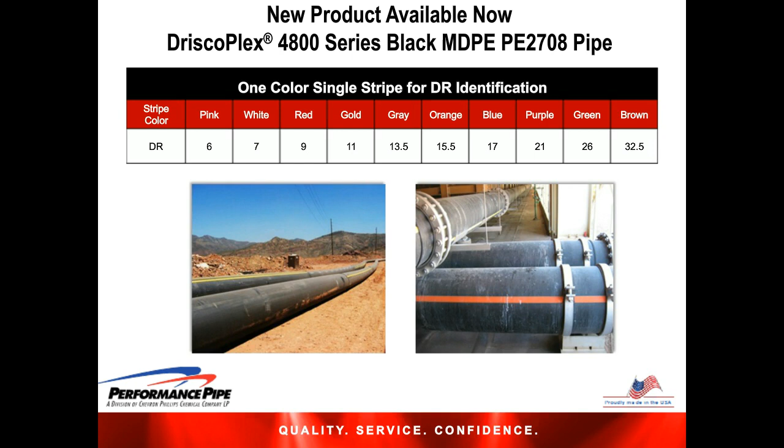This reflects the polymer's crystallinity, which in turn gives the material strength and stiffness. The second digit identifies slow crack growth resistance based on PENT testing, or Pennsylvania notch testing.

The last two digits provide the material's maximum recommended hydrostatic design stress for water at 73 degrees Fahrenheit. The PE 2708 material has the last two digits 08, which represents a hydrostatic design stress of 800 psi at 73 degrees Fahrenheit. This is the same hydrostatic design stress as a PE 3408 material, so the pressure ratings are the same.

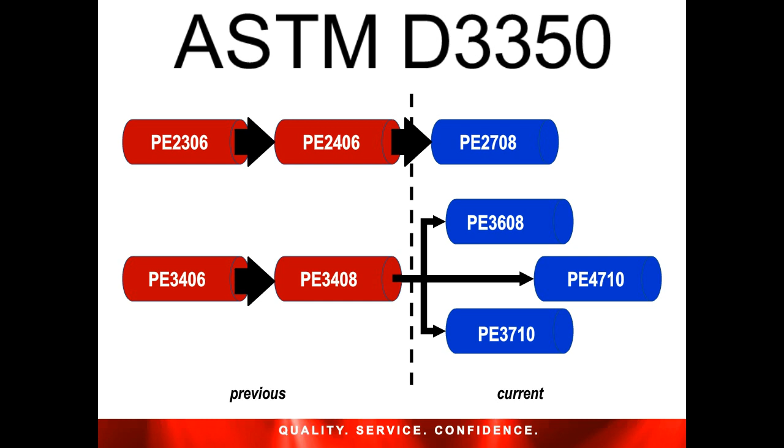For resistance to slow crack growth, a PE 4710 material requires greater than 500 hours of PENT testing, compared to the previous PE 3608 material requiring only 100 hours of PENT testing, while the new PE 2708 material achieves greater than 3,000 hours of PENT testing. This virtually eliminates slow crack growth as a failure mode.

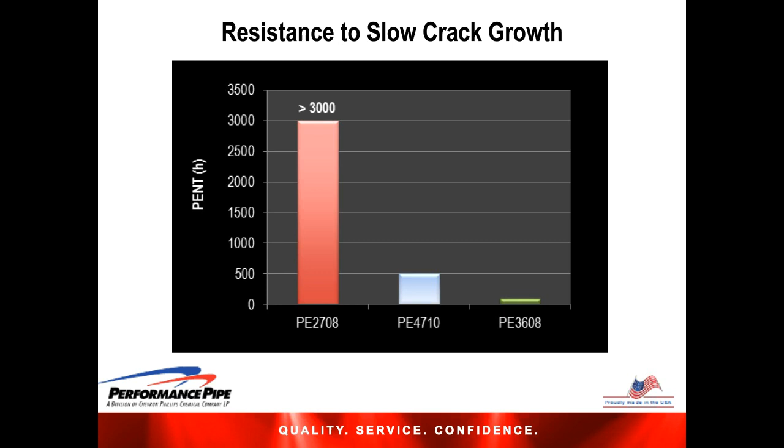Like standard PE 4710 materials, the PE 2708 is a solid wall pipe produced by conventional extrusion. The process is OD and wall thickness controlled to produce sizes from half-inch to 54-inch outside diameter, with dimension ratios, or DRs, ranging from DR7 to DR41.

In addition to the pipe's hydrostatic design stress we discussed, the pipe's specified dimension ratio, or DR, is used to determine the pipe's pressure rating or design pressure. Very simply, this is the outside diameter, OD, divided by the pipe's minimum wall thickness. So for a given outside diameter, the lower the DR, the greater the wall thickness.

The wall thickness capability for this new product is generally limited to around 2 1/4 inches as far as the wall thickness. However, that is dependent on the diameter of the pipe.

Basically, smaller diameter heavy wall pipes have more heat in the pipe than a larger diameter pipe. The bigger pipes have more surface area than smaller pipes, so the heat dissipates faster, resulting in less slump. So we can do heavier walls in bigger pipes than we can in smaller pipes. Please check with your distributor or pricing coordinator to determine the manufacturing capabilities to meet your requirements.

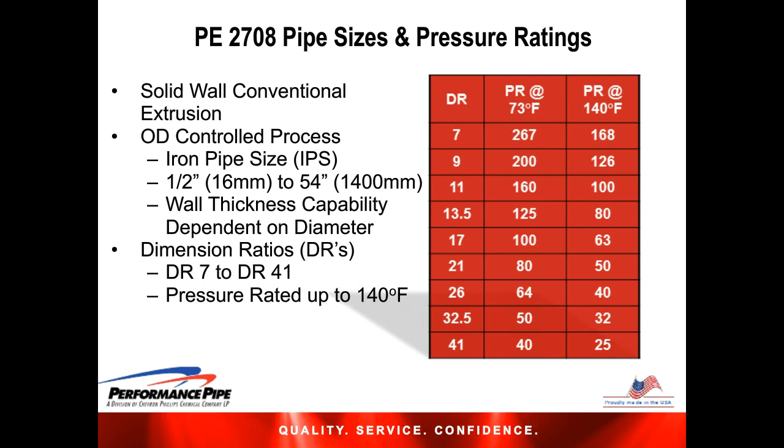These next two slides show the long, successful history of medium-density pipe in the United States. When the first medium-density pipe was introduced in the early 1970s as a PE 2306 material, it had a 600 psi hydrostatic design stress. In the early 80s, PE 2406 material was introduced with increased slow crack growth performance.

In 2005, PE 2708 material was introduced with an even greater slow crack growth requirement based on PENT testing. The material also achieved an increased hydrostatic design stress of 800 psi by meeting the criteria for a high-performance PE material.

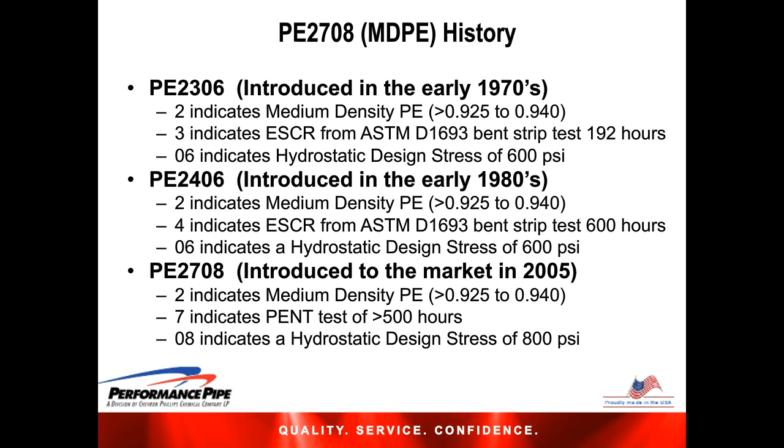Black medium-density pipe was first introduced in the early 1970s for potable water applications. Then, orange medium-density pipe was produced for natural gas piping beginning in 1974. By 1990, the orange medium-density gas distribution pipe was converted to yellow medium-density pipe. Yellow became recognized as the standard color for gas distribution piping in North America.

Today, PE pipe represents over 98% of the pipe installed for natural gas distribution in diameters up to 12-inch in the U.S. and Canada, with the large majority being medium-density polyethylene pipe compared to high-density.

DriscoPlex 4800 series MDPE pipe was introduced in 2016 to provide superior slurry flow abrasion resistance compared to other polyethylene pipes.

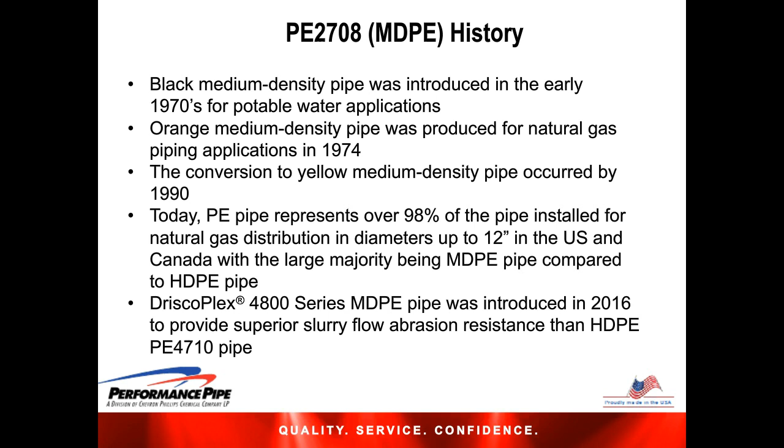This is our 4800 series specification sheet, which can be found on our website, along with our model specification for 4800 series. The model specification provides a lot of valuable information, including information on joining as well as installation.

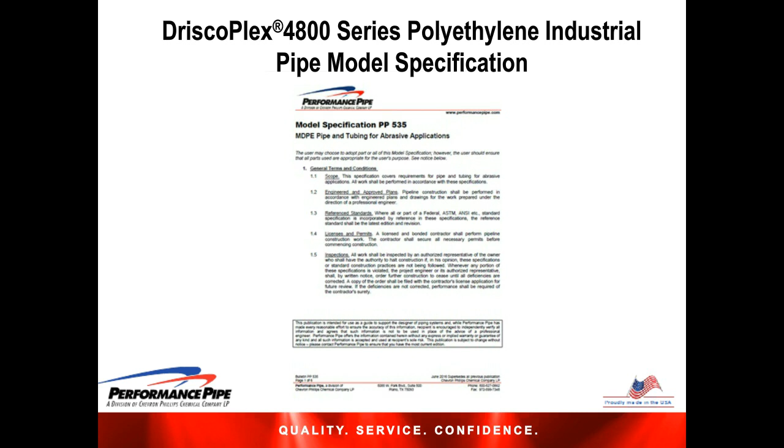For the next couple of slides, I will review some of the many benefits of our new medium-density 4800 series pipe systems.

The key performance attributes of the new 4800 series pipe are that we now have black PE 2708 MDPE pipe and tubing listed in PPI's TR4 that meets or exceeds the requirements of ASTM F714, D3035, API 15LE, or ASTM D2513. As you will see from Ashish's slides that are coming up, the pipe has greater than 30% resistance to abrasion compared to HDPE PE 4710 pipe, providing longer service life in slurry applications.

We also see this as a potential for customers to be able to use a thinner wall with a PE 2708 pipe while maintaining an equivalent life, resulting in significant cost savings in slurry applications.

The pipe is also greater than 6 times more resistant to slow crack growth compared to PE 4710 requirements. Another significant advantage is this pipe has lower stiffness, which aids in field handling, bending, and installation.

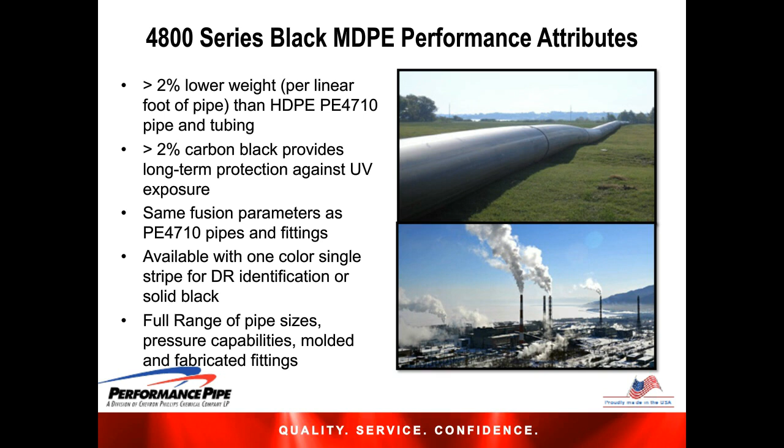Now I would like to turn over the presentation to Dr. Ashish Sukhadia to cover the fundamentals of plastic abrasion, followed by a discussion of pipe resin density and its effect on a pipe's wear rate. He will then cover the effect of a resin's molecular physical cross-links on plastic pipes' abrasion resistance, followed by a review of the recent third-party testing that was conducted and a summary of those results. Ashish, I'll turn it over to you now.

Okay, thanks Wes, and good afternoon to everyone once again. The intent of the few topics that I will be talking about is really to give everybody hopefully an appreciation of some of the science and fundamentals that we looked at as we came to the design and solution of the resin that Wes has just talked about.

I'll begin with this general topic of abrasion, but it's interesting to note that the study of abrasion falls within a rather broad field of science and engineering known as tribology. Tribology has its etymology roots in the Greek word tribos, which means to rub, rub down, or wear away. And thus tribology, in its most general sense or definition, is the study of, or perhaps more appropriately, the science and engineering of the behaviors and responses of interacting surfaces in relative motion to one another.

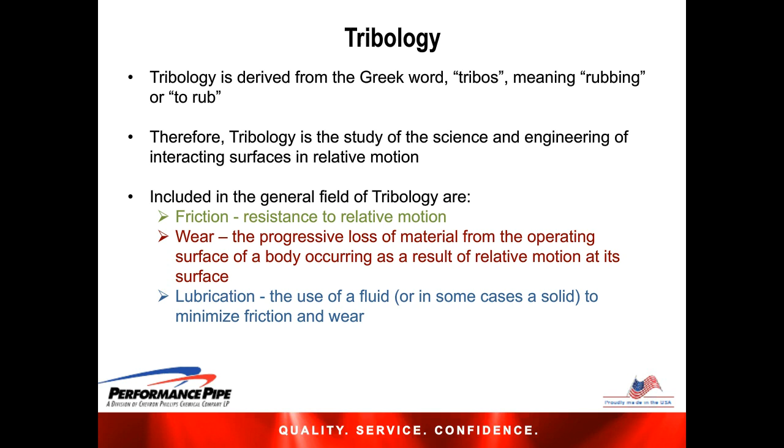Abrasion is a very complex area, and the resistance of plastics to abrasion is dependent on many factors: the nature of the plastic, surface roughness, lubricating agents, load, material hardness, and beyond that many other factors. The relative type of motion could be reciprocating, continuous, or geometrical in terms of sliding or rolling motion, operating conditions such as speed and temperature, and the nature of the abrading material: size, geometry, concentration.

So perhaps the most important takeaway that I would like to leave you all with is the fact that abrasion resistance should not be regarded as a material property, but rather a tribological system response, meaning that it depends on a lot of other factors and particulars of the system at issue.

Abrasion resistance, however, could be broken down into two main classes, the so-called adhesive wear and cohesive wear. In adhesive wear, which is also sometimes referred to as interfacial wear, that involves the transfer of polymer to a harder counter surface and its eventual removal as debris. Perhaps the most common day-to-day example is simply the process of writing with a graphite pencil on paper.

Cohesive wear, on the other hand, involves either fatigue wear, which is failure due to repeated dynamic loading, such as what might be seen in ball bearings as an example, or abrasive wear, which is essentially a cutting, plowing type of damage due to permanent plastic deformation. A couple of common examples here would be the wear on kitchen knives or currency coins after many years of use. So wear is generally thought to be basically proportional to the applied load and inversely proportional to the hardness, meaning that a harder material might be expected to wear less.

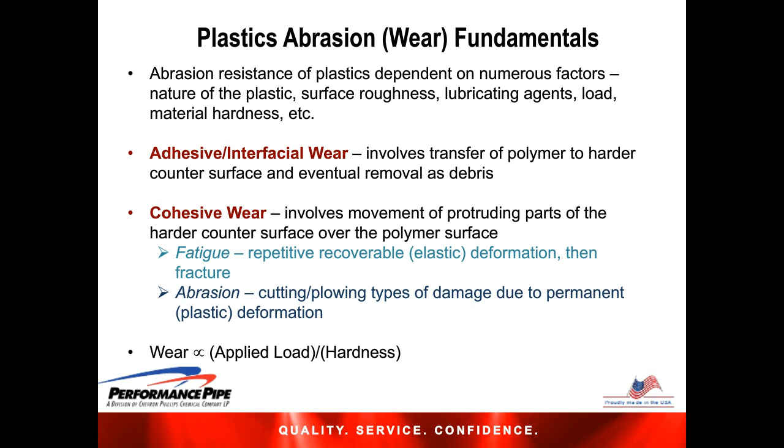While that is generally true in the case of metals, it turns out that in the case of plastics, that's actually not true. Contrary to popular and intuitive belief, the abrasion resistance of plastics does not correlate directly or proportionately with hardness.

In fact, most of the data in the literature has found just the opposite. This snippet comes from a referenced article by Lowe and Marshall, which states that metals tend to have greater abrasion resistance as hardness increases, but polymeric materials show a trend almost opposite to this. German work showed increasing abrasion resistance of polymers with decreasing elastic modulus, while the opposite trend was observed for metals, and materials with elastic modulus around 10 giganewtons per meter squared, which were found least abrasion resistant under direct impact abrasion conditions.

The difference is thought to be due to the fact that in metals, which are much harder, as hardness increases it's more difficult to form a scratch or gouge, but once formed, it's easier to remove the material. Plastics, on the other hand, are much softer, and although they may scratch more easily, material removal is harder due to the elastic nature of the material. In other words, the viscoelastic nature of polymers affects abrasion resistance more so than simply hardness, as is the case with metals.

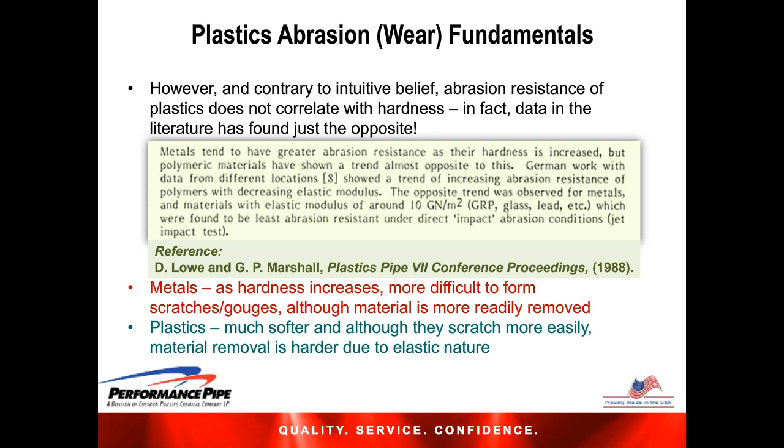So we look now at a little bit of data from the literature to support this notion that abrasion wear in plastics is really quite different from that in metals.

We begin with data from the Lowe and Marshall article again, where three plots are shown: wear rate as a function of tensile yield stress, wear rate as a function of tensile modulus, and wear rate as a function of tensile yield strain. Each of these properties is basically directly dependent on density. Taking the composite analysis of these three charts, all three results consistently suggest that wear rate is higher, or worse, with higher density.

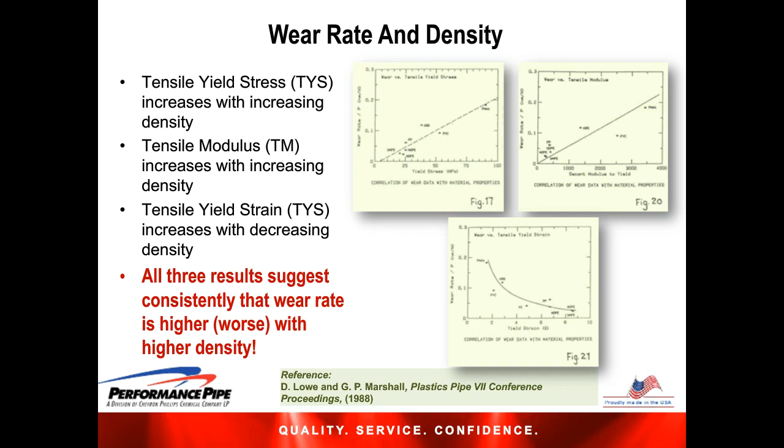This slide shows data from an article by Lancaster, published in the Wear magazine in 1969. It's a fairly dated article, but the science has remained much the same. This plot shows the wear rate against the inverse of the product of ultimate break strength and elongation, shown on the x-axis. Plots like this have been subsequently shown in the literature many times and are referred to as the Ratner-Lancaster Correlation.

The x-axis, the product of tensile strength at break and elongation, is an indication of material toughness—as toughness increases, this product increases. But note this axis is the reciprocal of that product, meaning tougher materials are to the left side, and they generally show less wear. For polymers, many molecular factors come into play, but other things being equal, generally lower density resins are tougher and therefore exhibit lower wear, per the results of this study as well.

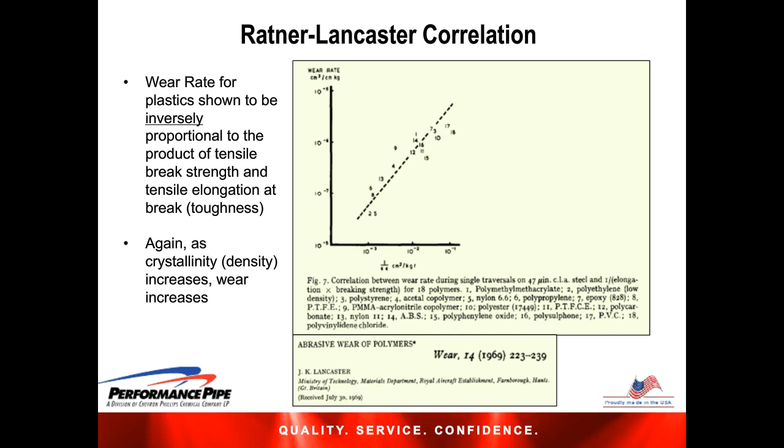We then move on to another set of data published in Macromolecules magazine in 2002, an article by Tervoort. This was a fairly seminal study, perhaps most relevant here, because they investigated the abrasive wear behavior of linear polyethylene resins spanning a very broad range of molecular characteristics—basically 3 orders of magnitude in molecular weight, different distributions both monomodal and bimodal, and a variety of polydispersities or molecular weight distributions ranging from monodispersed, around 2, all the way up to as high as 80. Their goal was to elucidate the macromolecular origin of abrasive wear in polyethylene.

Perhaps the seminal part of their finding was that abrasive wear for plastics was primarily dependent on what they referred to as the effective number of physical crosslinks per macromolecular chain.

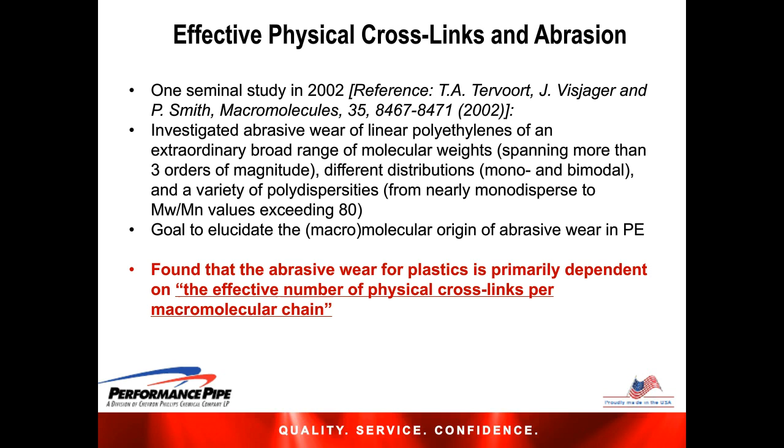We look here at a couple of key results from that published study, shown in this slide are basically two of their plots. The left one shows the wear coefficient or wear rate as a function of the parameter phi mn star, and the right one shows wear rate as a function of crystallinity. The left chart shows that wear rate decreases as this phi mn star product increases, and this product is basically a reflection of the number of physical crosslinks. In other words, as the number of physical crosslinks increases, the wear rate decreases.

On the right side, keep in mind this was all data for polyethylenes only, and crystallinity is directly tied to density. You can see very clearly here that as density increases, the wear rate also increases in a fairly linear fashion, meaning once again that the lower density products would be expected to have better wear performance.

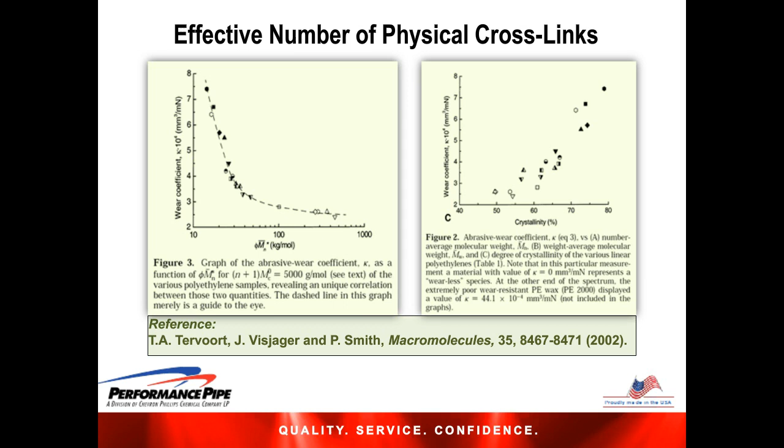So we took all of this science and understanding and decided to do a little bit of testing with our own resins to see if these fundamentals held true. To that end, we took three different polyethylene resins within the Chevron Phillips pipe family: the medium density resin that Wes talked about earlier, a unimodal high density resin which was a PE 4710 class pipe grade material, and a bimodal high density PE 4710 class pipe material as well. This was done to give us a good broad range of molecular structures and make the results more relevant.

The tests were conducted at White Rock Engineering Services based in Texas. In the results you are going to see in the next couple of slides, bear in mind that a lower SAR, or slurry abrasion response number, indicates better abrasion resistance. To cover the effects of temperature, we did the test at both room temperature, 73 degrees Fahrenheit, and the elevated temperature of 140 degrees Fahrenheit.

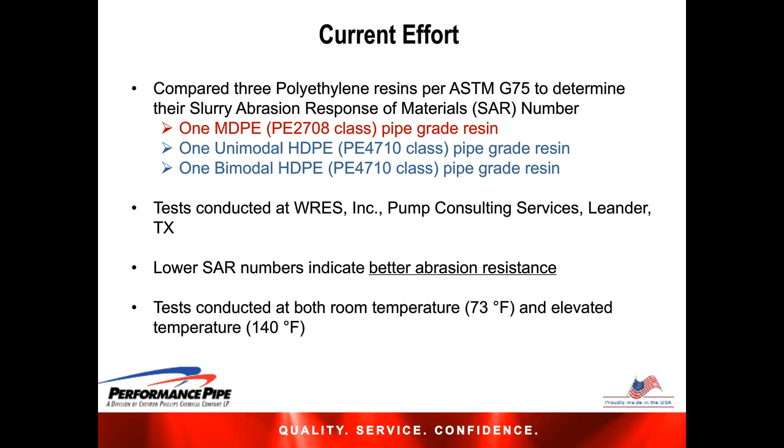Just a little bit about the details of the ASTM test by which these tests were conducted, ASTM G75. That standard is a standard test method for determination of slurry abrasivity, which allows one to determine a Miller number, or the slurry abrasion response of materials, represented as an SAR number. This test method can determine either the relative abrasivity of any slurry or the response of different materials to the abrasivity of different slurries, so there's some flexibility in how the test is conducted.

The slurry abrasion response number, or SAR number, is a relative rate of volume loss of any solid wearing specimen in a given slurry. In our particular case, which is a fairly standard test protocol, the test was conducted using AFS 50-70 test sand, with 150 grams of sand and 150 grams of deionized water, meaning the concentration was 50% by weight of the abrasive media, which was sand.

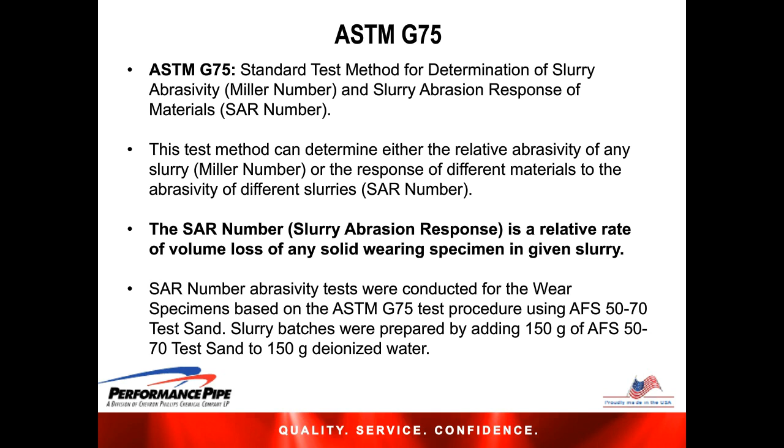We start by looking at this table where we have listed the resin properties, primarily the high load melt index and the density, again for the medium density and the two high density resins. Shown in the lowest row is what we refer to as the abrasion index, using the same methodology and principles of the published paper I talked about earlier. Going through the analysis, it showed that the medium density resin would have a higher abrasion index, meaning better resistance to abrasion than either of the two high density resins. This gave us a little more confidence in the approach we were taking.

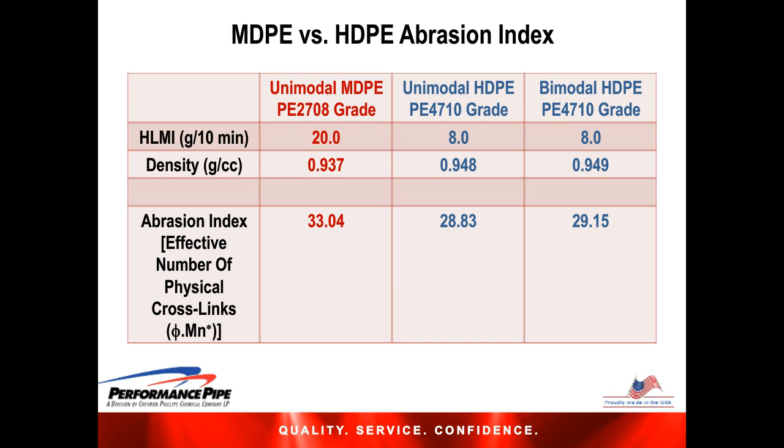The key was really, do the experimental data we received from the lab actually support that? That's shown in this slide, where on the left axis is the SAR, or slurry abrasion response number. The data shows the first two columns for the medium density: the lighter gray bar is for 73 degrees F, and the darker blue bar is the same data for 140 degrees F. As I mentioned, the lower the SAR number, the better the abrasion resistance, and you can see quite clearly there's a noticeable difference of about 35% lower abrasion for the medium density relative to either of the two high density materials.

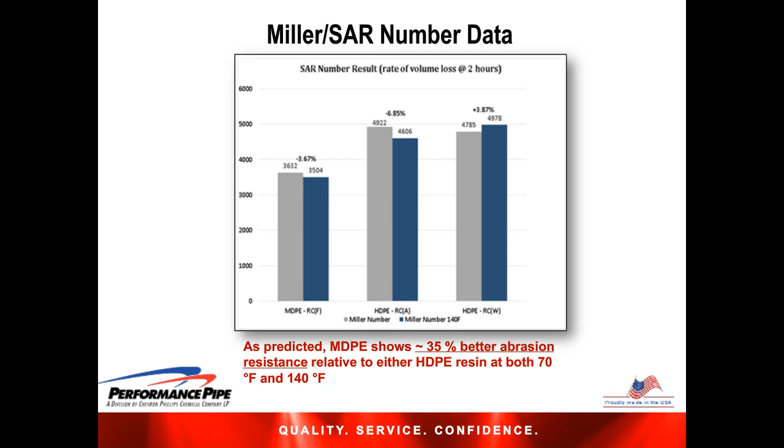This was further validated by simply looking not at the calculated SAR number, but the raw mass loss at the end of the 6 hours of the test. This is cumulative weight loss, shown in the lowest two rows at the 70 degrees and 140 degrees F temperatures. You can see quite clearly in the raw data a fairly significant difference, with both high-density resins showing much higher wear on a relative basis compared to the medium-density resin.

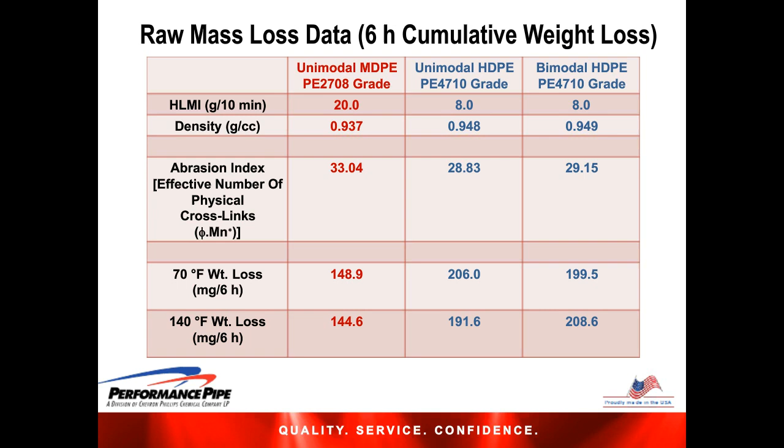One last slide on this, where we took the data published in the article I referenced by Tervoort et al - that's the data in blue. Chevron Phillips had data for a number of different polyethylene resins we tested over time using the slurry abrasion response test, ASTM G75, and that data is superimposed with a shifted factor to accommodate all the data on one slide, shown in red.

The Chevron Phillips data is shown on the right by itself, and you can see the same trends we saw earlier, which is that the slurry abrasion response number is exponentially dependent on this physical crosslinks factor. This validates our thinking and further confirms that the medium density pipe with the higher number of physical crosslinks should have, as the data supported, significantly improved abrasion resistance.

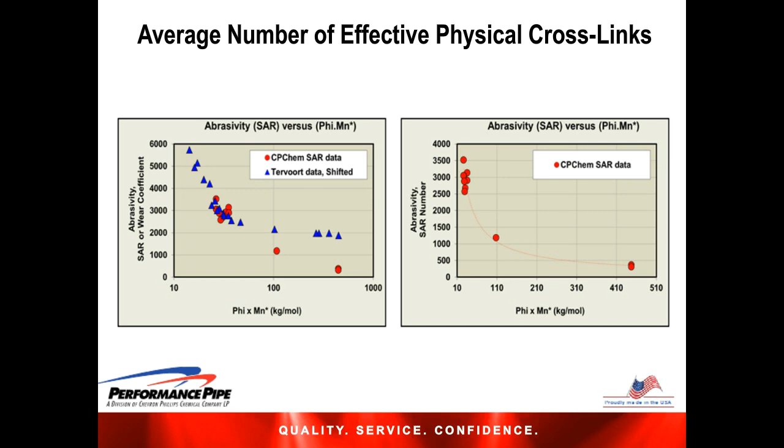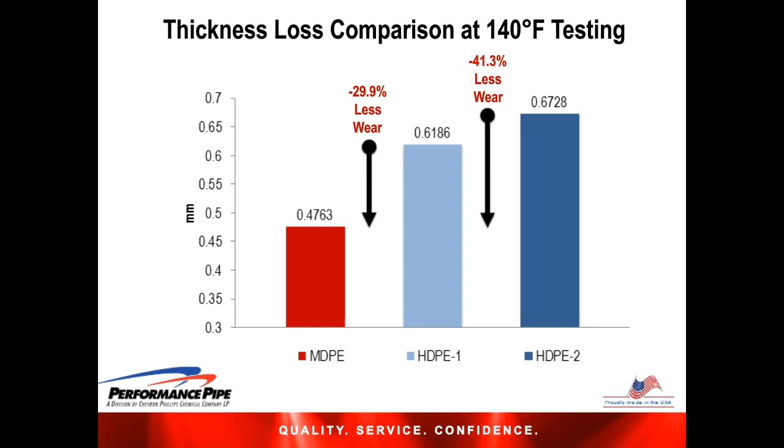In summary, I think we feel pretty good about the data we've generated, which appears to show, as much of the literature I covered showed, that the abrasion resistance of plastics seems to be pretty well defined through the concept of this effective number of physical crosslinks per macromolecule, as originally proposed by Tervoort and his group. It's a little counterintuitive, but it's interesting to note that the abrasion resistance of plastics does in fact show an inverse dependence on hardness or crystallinity, and the wear is influenced by the elastic nature of the plastic.

As predicted from the fundamentals, the medium density resin was indeed predicted to show better abrasion performance, or higher abrasion resistance, compared to the two high density resins, and the data proved that out quite well. So it is our expectation that this particular unimodal medium density 2708 pipe resin that Wes talked about is going to perform very well in mining, industrial, energy, and liner applications, and is clearly indicated based on data to be a better choice than either bimodal medium density or unimodal/bimodal high density resins or pipes, due to the better abrasion resistance we are seeing, rooted in the fundamentals of the polymeric response.